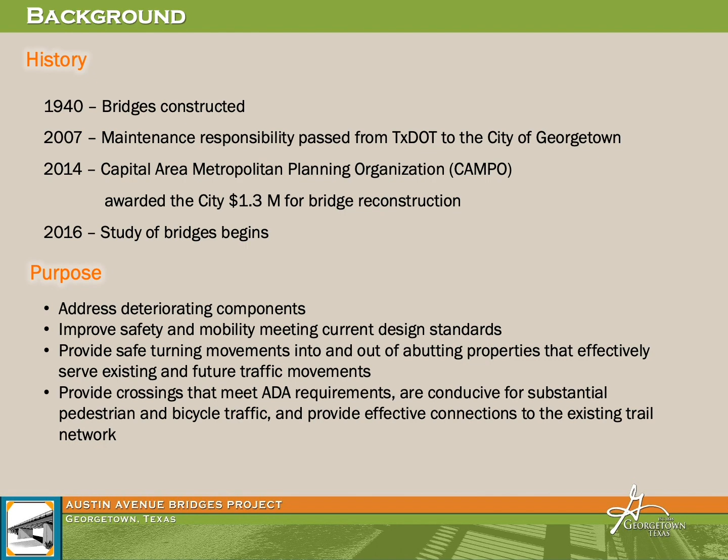This project is following the National Environmental Policy Act, or NEPA, which is required when there is federal or state funding. NEPA requires that several options or alternatives are evaluated and requires the opportunity for public comments. Through this process, we've had 4 public meetings and received more than 400 comments.

In 1999, the bridges were eligible for the National Register of Historic Places. Because of this, the project meets the requirements of the National Historic Preservation Act. The formal process for Section 106 has been followed. This included coordinating with consulting parties, made up of 17 people that requested to be involved, as well as the Texas Historical Commission and State Historic Preservation Officer.

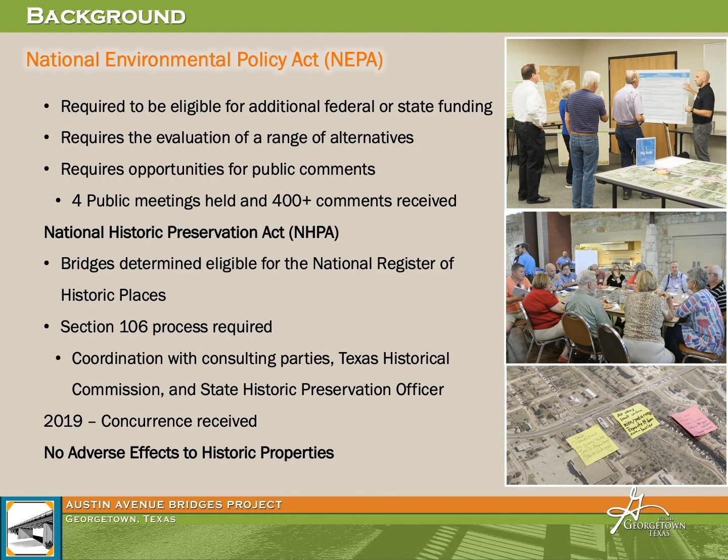In late 2019, the project received concurrence from the State Historic Preservation Officer that the preferred alternative had no adverse effects to historic properties. Next, we will look at how we arrived at a preferred alternative. We started with 12 preliminary alternatives.

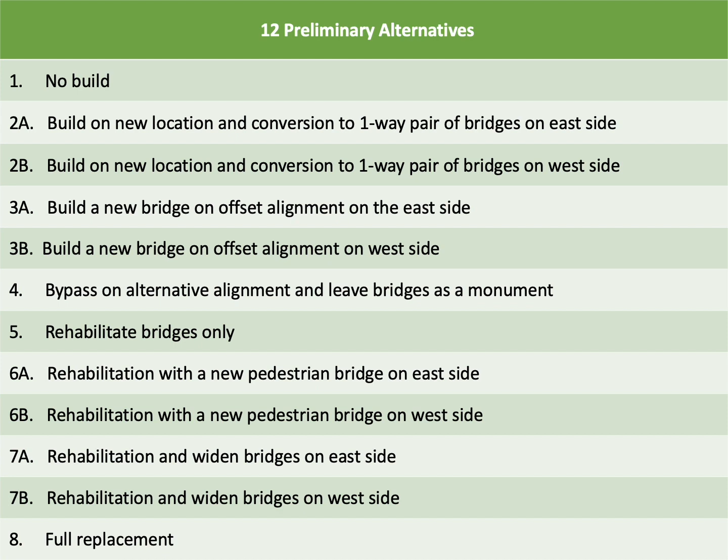These ranged from doing nothing to converting to 2 bridges, each going one way, widening the existing bridge, rehabilitation, and a new pedestrian bridge. These were evaluated, and the alternatives that had more of an impact on historic properties or needed more right-of-way were removed from further consideration. That left 5 primary alternatives.

We developed schematic designs for each of these primary alternatives and evaluated whether it met the purpose and the goals of the project, the environmental and historical impacts, the amount of right-of-way that would be needed, construction cost and impacts, and the estimated lifespan. All the alternatives were presented to the public for feedback.

Alternative 6A, rehabilitating the bridges with a new pedestrian bridge on the east side, was the most supported by the public. After evaluating the technical aspects and hearing from the community, 6A was chosen as the best option to move forward.

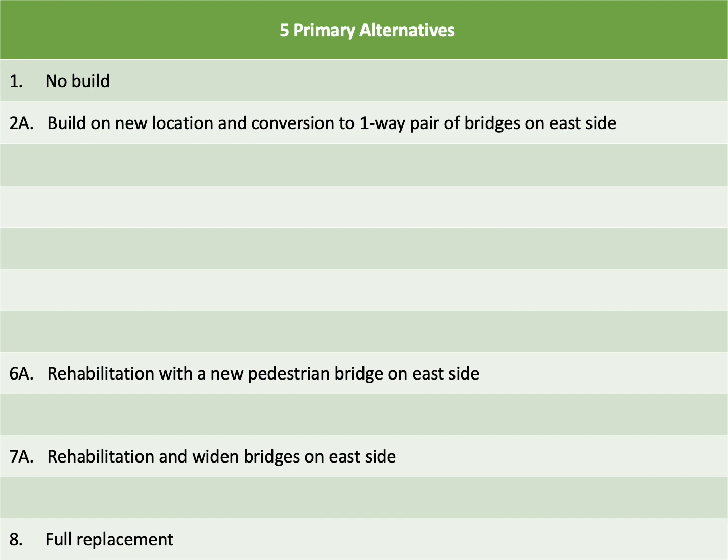The improvements are to rehabilitate the existing bridges and maintain the railings, widen lanes to 11 feet, construct a new pedestrian bridge and a 10-foot sidewalk on the east side of Austin Avenue, construct a 6-foot sidewalk on the west of Austin Avenue at the intersections of San Gabriel Village and 2nd Street. This option will require a small amount of right-of-way on 2 corners, totaling approximately 0.003 acres.

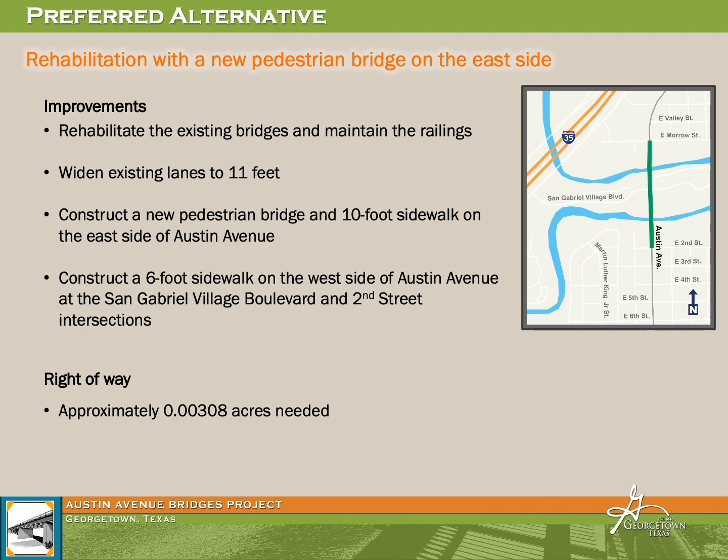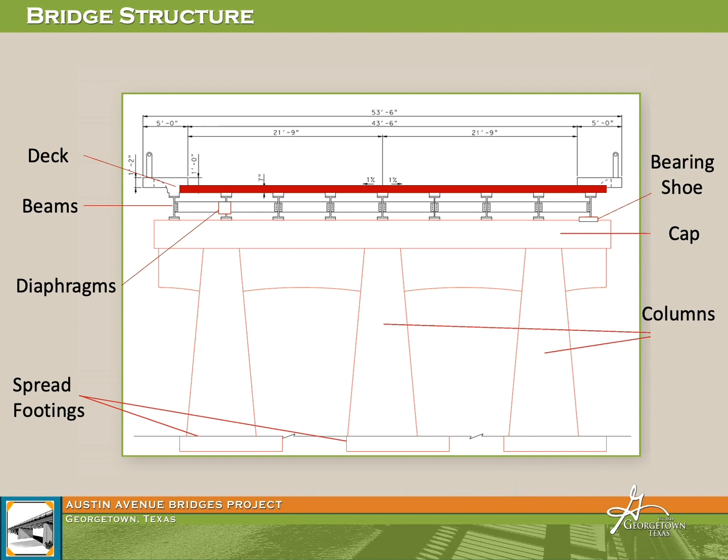Dave Lupitz, our project engineer, will share a few more details on what the rehabilitation includes and a review of the schematic design. Thank you, Erin. Just like lifting your car with jacks to replace its tires, the bridge will be lifted to replace its bearings. The beams and diaphragms will also be cleaned and repainted, and concrete damage will be repaired on the caps and the columns. The concrete deck will also be replaced during the rehab. Additionally, the existing rail will be maintained, and there will be an addition of a crash-tested rail to the bridge.

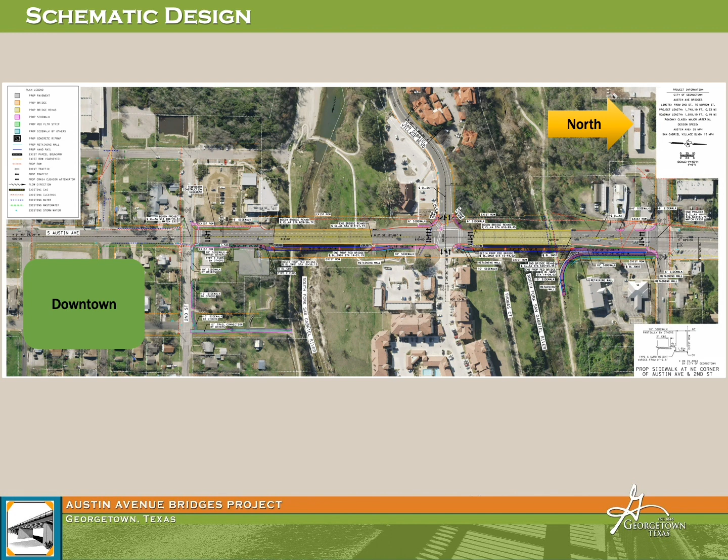Here's the overall schematic. I realize the details are tough to see in the video and encourage you to download the files from the project website. Downtown is to the left, and you can see the 2 bridges outlined in yellow over the south and north fork of the San Gabriel River. As we go to the close-ups, you'll see the pedestrian bridges are to the east of the existing facility and highlighted in pink with a blue outline. Additionally, the sidewalk improvements to the west are highlighted in pink only.

As we take a closer look at the bridge over the South Fork, you can see that the sidewalks on the bridges will be removed. This is to accommodate widening the travel lanes to 11 feet and additionally having shoulders on the bridge without acquiring additional right-of-way. The new pedestrian bridge will be the designated river crossing for both pedestrians and cyclists.

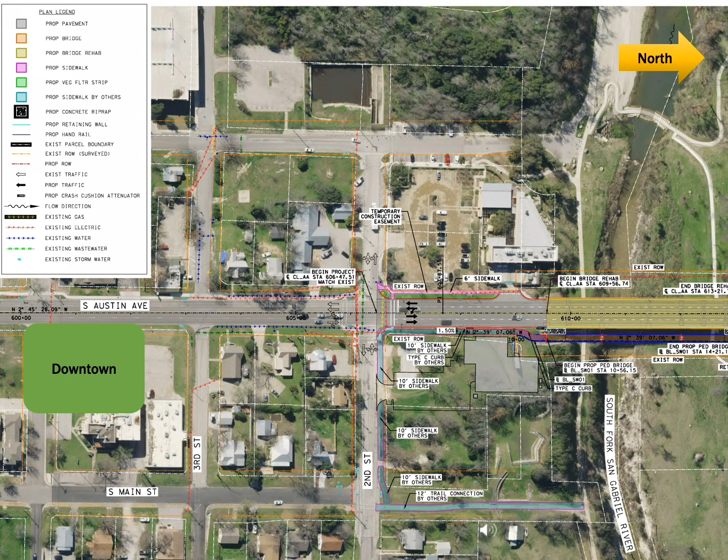If you look to the east along 2nd Street, you can see that the trail connection to the South Fork, highlighted in light blue and outlined in pink, is off Main Street. The city plans to improve this connection in future projects. As we move toward San Gabriel Village Boulevard, you can see where small slivers of right-of-way will be acquired. This is needed to construct safe turning movements and tie in sidewalk.

As we continue north along the pedestrian bridge, you can see that it connects directly to the existing trail along the North Fork of the river. The area highlighted in green next to the bridge as you approach the trail are retaining walls. Retaining walls will be constructed here to provide an ADA-compliant pedestrian path without acquiring additional right-of-way. In the next few slides, Erin will show you potential design features for the pedestrian bridge, for trail connections, and for retaining walls.

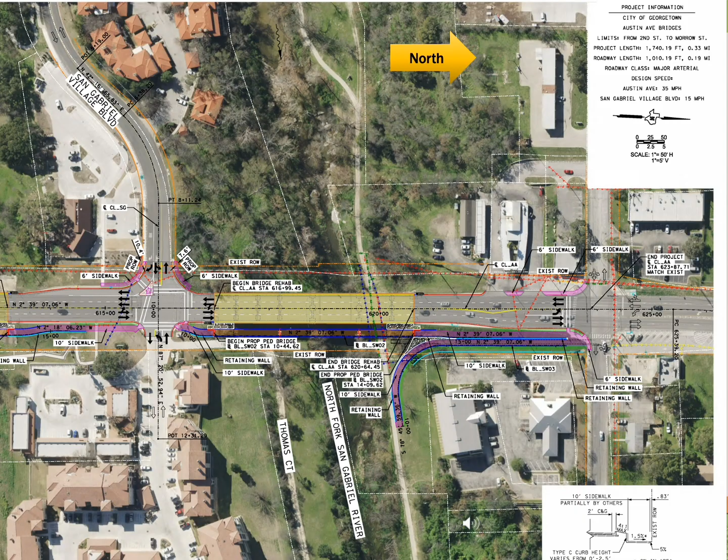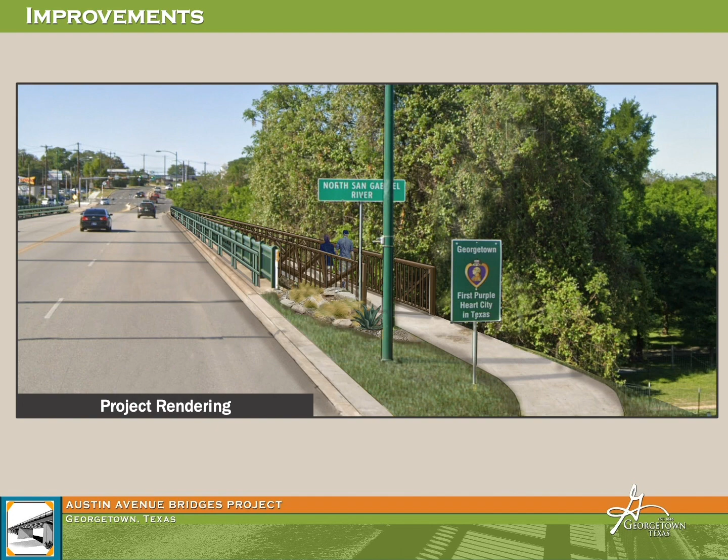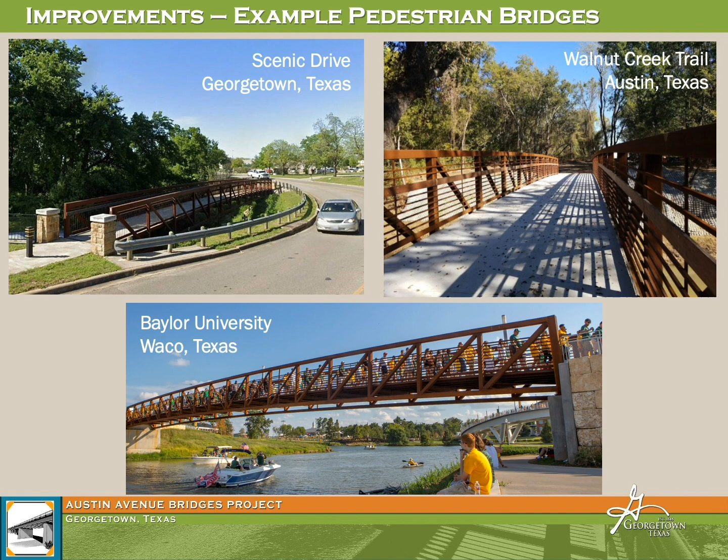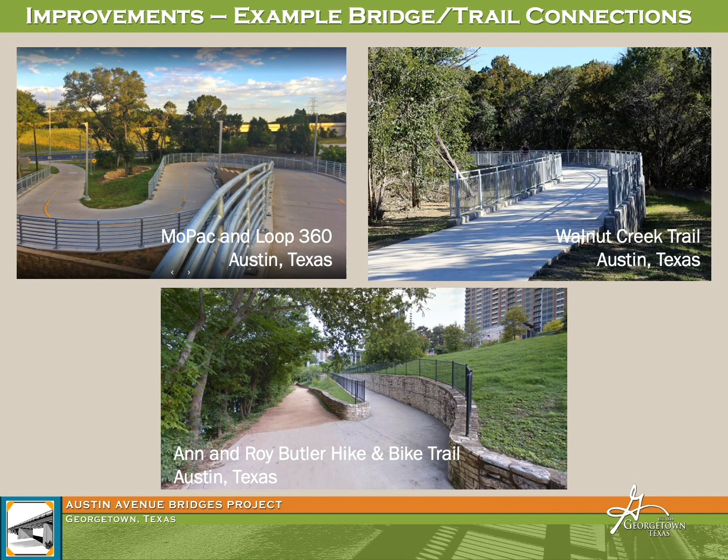Here are a few examples of trail connections. One is near Mopac and Loop 360, and one at Walnut Creek Trail. The bottom photo illustrates an example of a trail connection with a retaining wall at the Hike and Bike Trail in downtown Austin. We'll show here designs that can be used on retaining walls. To take a closer look at these additional pictures, please visit the project website.

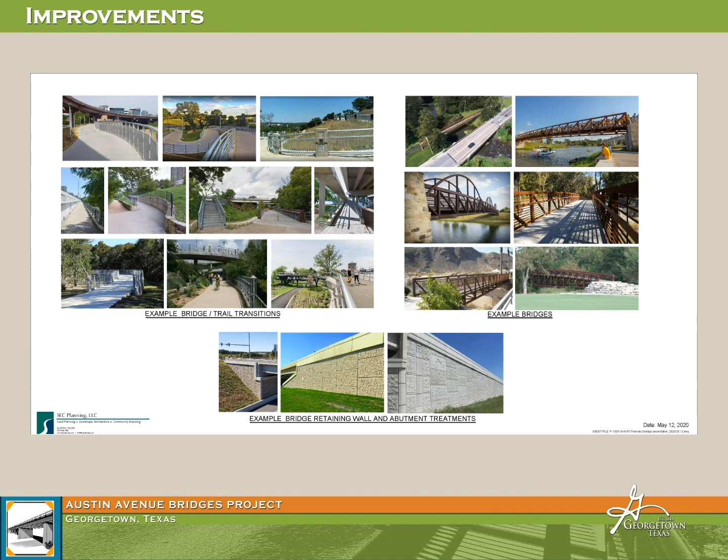Now, looking forward, our team will work to complete final design and prepare construction plans, obtain environmental clearance, and begin negotiations for the right-of-way acquisitions. This will be complete in 2021. Then we would need to secure all construction funding and hire a contractor. The very earliest construction could begin is in 2022. As more details are available, the city will continue to share information. Now I'm going to pass it back to Ray for more details on construction.

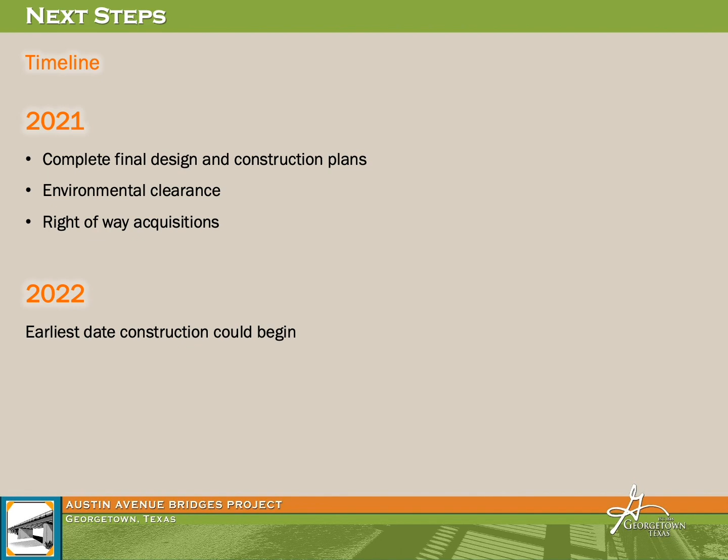Thanks again, Erin. Construction for this project is anticipated to cost approximately $7 million. As we mentioned, we have secured $1.3 million from CAMPO. The city is working to identify additional funding. Some possible sources include TxDOT funds, which we are applying for, and city funds. The timeline for completing the bridge rehab and to construct the pedestrian bridge is approximately 24 months. This timeline is subject to change as construction could occur in phases. More details will be shared as construction is planned and scheduled.

Access to surrounding properties will be maintained. At least one lane of traffic will be open in each direction. At times, pre-coordinated overnight closures of all lanes will be necessary to complete the bridge rehabilitation. However, advance notice will be provided. In addition, when construction activities are heaviest, we will do what we can to promote alternate routes to downtown and surrounding businesses.

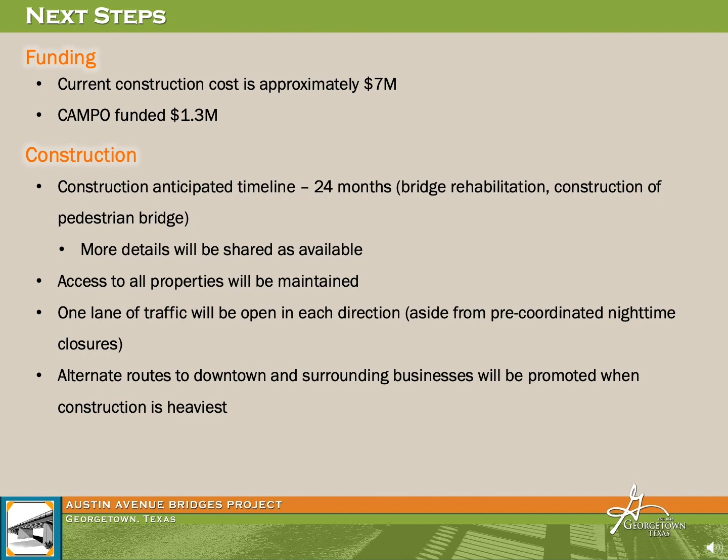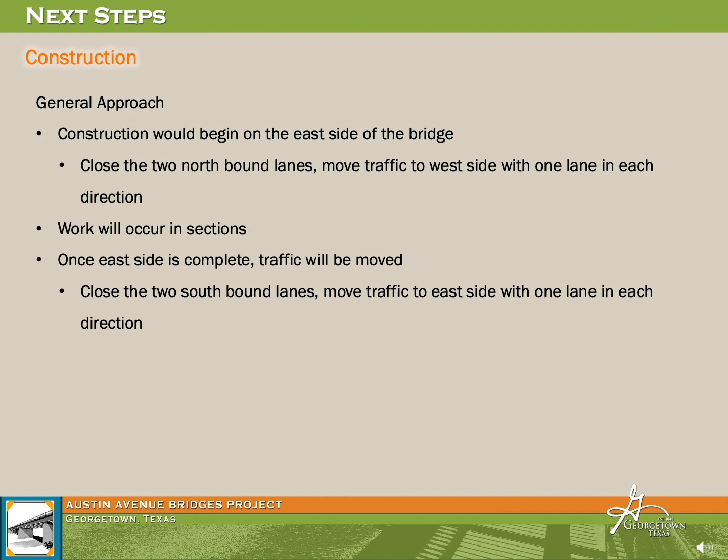We plan to begin construction on the east side of the bridge. This means we would close the northbound lanes and shift all traffic to the west side, again with one lane open in each direction. The rehab will occur in sections, moving from one end to the other. Then once the east side is complete, work will begin on the west side. We will close the two southbound lanes and move traffic to the east side of the bridges with one lane open in each direction. We will be coordinating with businesses, affected property owners, and informing the public when more details are available. This concludes our project overview.

We do want to remind you there are several options for submitting comments. You are welcome to share them by email, the online form, or mail, and the comment period will be open through June 12th. All contact information is available on the website, the same place you access this presentation, austinave.georgetown.org. We did receive 12 comments in response to our first notification. Thank you for sharing these. We have provided responses which are also available on the website.